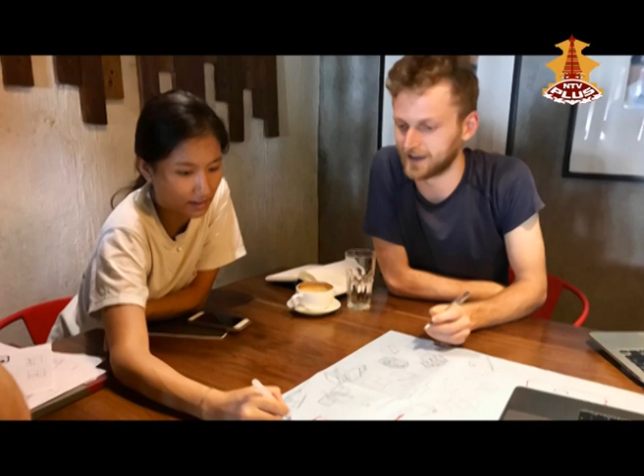We also took a look at the site where the homes would be located in order to let the topography and the views influence our design process. With this information, we've been developing designs for sustainable earthquake-resistant homes in Silung that we're excited to share.

The site visit helped us contextualize where our project would be located and truly understand the needs and values of the people who would be living in the houses we design. Through interviews with locals and tours of their current homes and farmland, we identified 2 main conceptual ideas unique to our design, while still fitting within the limits of earthquake-resistant structure and a vernacular style local to the region.

First, an open common space, and second, a flexible private space.

One of the most memorable moments of this trip was when our entire team sat on the front deck of a house eating freshly boiled potatoes with the family that lived there. We felt very welcomed by this warm gesture, and after hearing other stories of how villagers welcomed their guests, we felt it was incredibly important to recreate this space in our design.

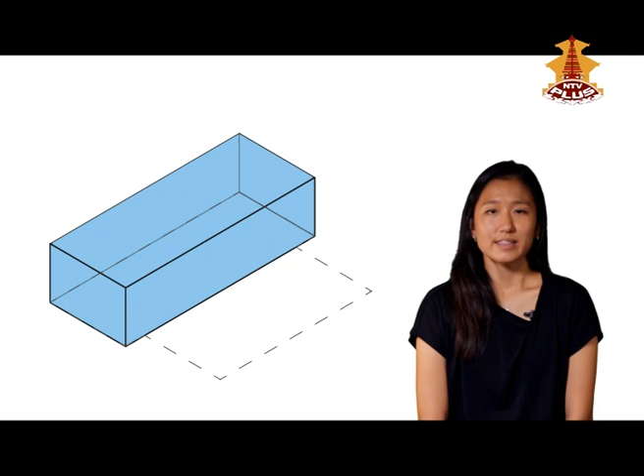In addition to a similar outdoor deck space covered by a roof overhang at the front of the house, we decided to bring this potato space inside the house as well. We did this by incorporating a tall, open kitchen, living, and dining space that would help facilitate these special moments even during the colder winter months.

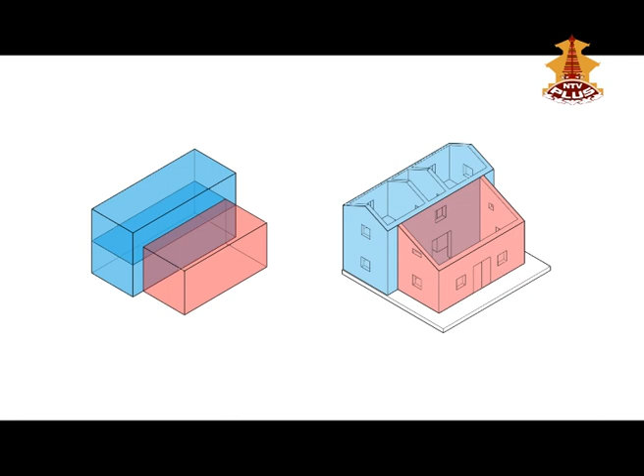We also noticed that each family's physical living conditions were influenced by their specific needs and family sizes. Because we want a design that is easily replicable across all hilly regions of Nepal, we created a plan that could be easily adapted to best fit the lifestyles of those who would live in them, without having to redesign the entire structural system.

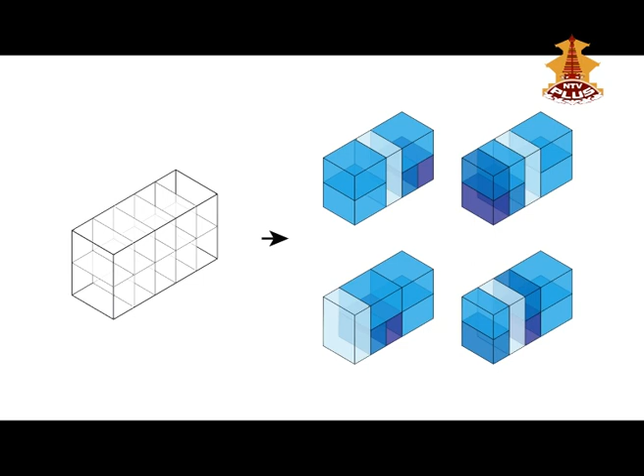Although this image depicts a medium-sized prototype, a house can have as little as 2 twelve-foot by twelve-foot bedrooms, or as many as 5. All houses would include a bathroom and storage space inside. Finally, our prototype for the medium-sized house includes a small window from the second-floor private area looking into the tall common space below, providing a visual connection between the public and private areas of the house.

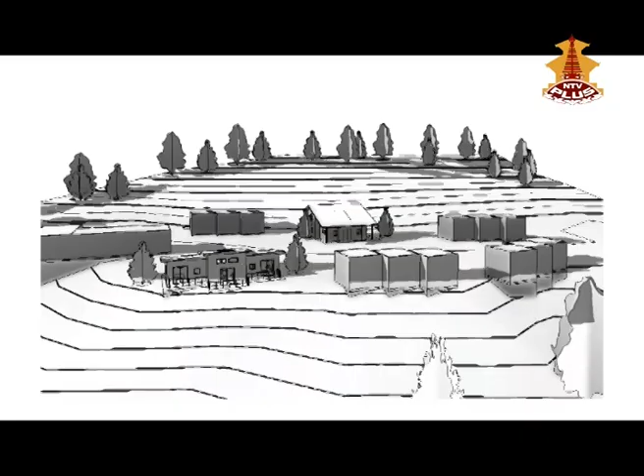After coming up with our design strategy for both the site and the house, we used some digital tools to help evaluate our designs. These tools help us integrate architecture, structural design, energy efficiency, and thermal comfort into one complete concept.

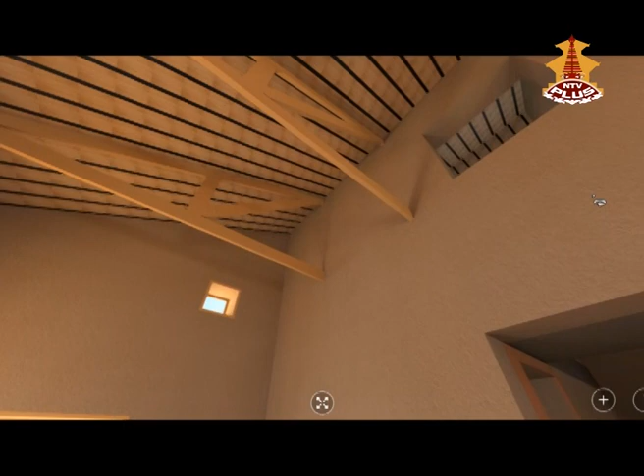By creating a 3D model of the house, we can digitally experience what it's like to actually be inside the rooms. Here, we're looking around the kitchen and dining space to see how the windows and openings, structural design, and furniture layouts look from the inside.

We can also experience what the design looks like from the outside, standing on the site. This can help us understand if the design fits in with the area around it.

When designing a house in a climate that gets both cold and hot, it's important to regulate the interior temperature of the house as much as possible. In the northern hemisphere, the sun moves across the southern half of the sky, casting its powerful rays on the southern walls of our buildings. This solar energy can help heat the house in the winter if we let it in through the windows.

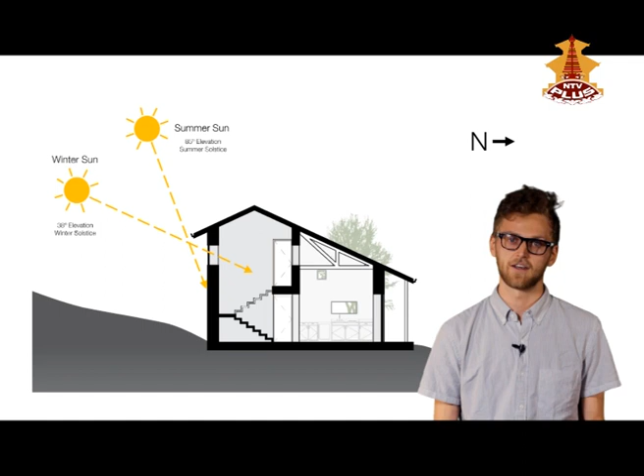We can take our 3D model and digitally place it in the exact region of Nepal where our site is located. Then we can see how the winter sun shines on the house.

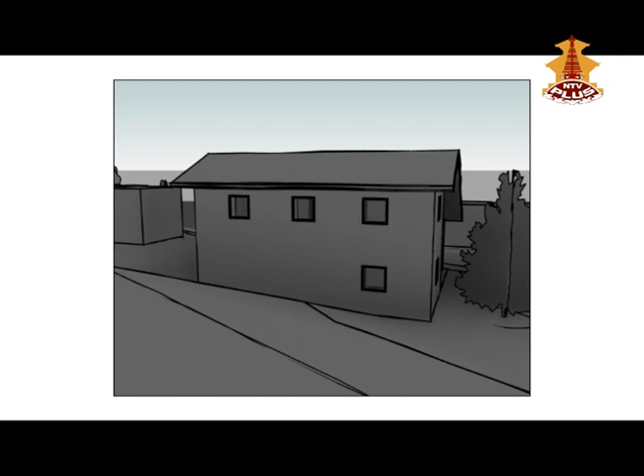Since no shadows are being cast on the windows, our concept of heating the house with the sun is working. In the summer and fall, however, it can get quite hot in the hilly regions of Nepal, so we want to let as little solar energy into our house as possible. The roof overhang in our design does a nice job of keeping the sun's rays off our windows, helping the house stay cool when it's hot outside.

These digital modeling tools can help us quickly evaluate the architectural concepts, structural designs, and aspects of comfort that are critical to building a better house. One of our design goals for this project was to figure out how to design for thermal comfort.

Thermal comfort describes the conditions in which you might feel too hot, too cold, or comfortable within a space. Indoor thermal comfort can be based on a variety of factors, such as the weather, how much insulation or thermal mass you might have in your building, or even what you're doing or wearing indoors. And because we're designing for a climate that's constantly changing, this becomes an especially important challenge. So, to improve thermal comfort, house designers will often look at a variety of design factors, such as heating and cooling devices, building materials, and ventilation.

One strategy we used was thermal mass, the ability for certain materials to resist changes in temperature. Materials that are higher in thermal mass are able to capture heat during the day when the sun is out and warm, and release it during the colder hours of the night in order to keep the house at a constant temperature. For that reason, we chose materials like mud and stone for our walls and floors.

And for days when it's cold outside and you don't want to lose heat from your home, insulation materials like rock wool are a great option for keeping your spaces warm.

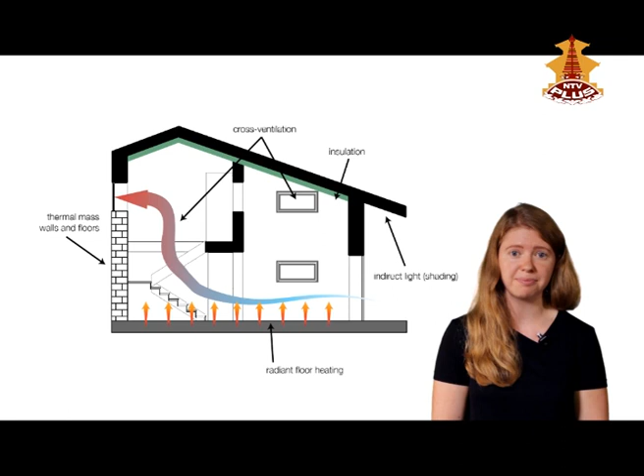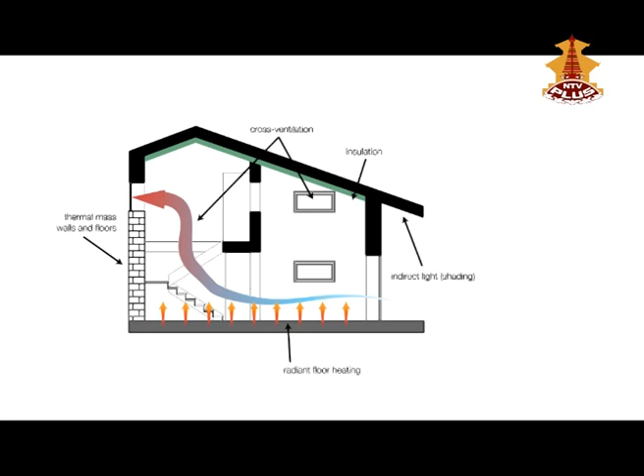We also used cross ventilation, which occurs when you have openings in your doors and windows that are arranged on opposite sides of a building, allowing air to enter and exit. We placed our windows and doors strategically in this manner in order to keep our house cooler. This design is effective because it allows for more frequent changes of air in and out of the house, naturally keeping the indoor temperature cooler when it's hot outside.

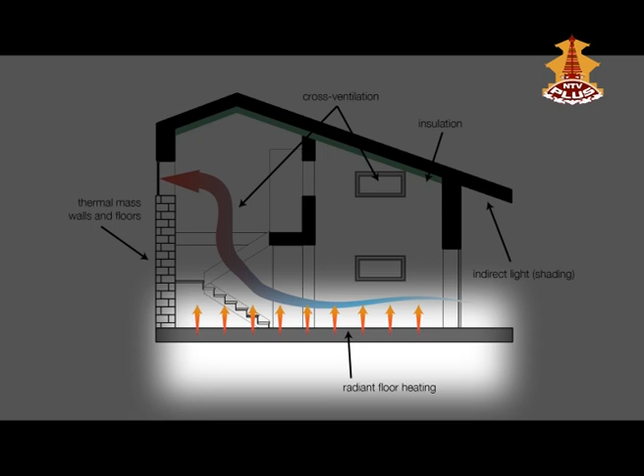Finally, to heat our homes, we wanted to look at an option that was more efficient than popular space heaters, which can often create cold spots. Because traditional heaters warm the air and not the objects or people inside, there could be areas of the room that are extremely hot or cold based on where they are relative to the heater.

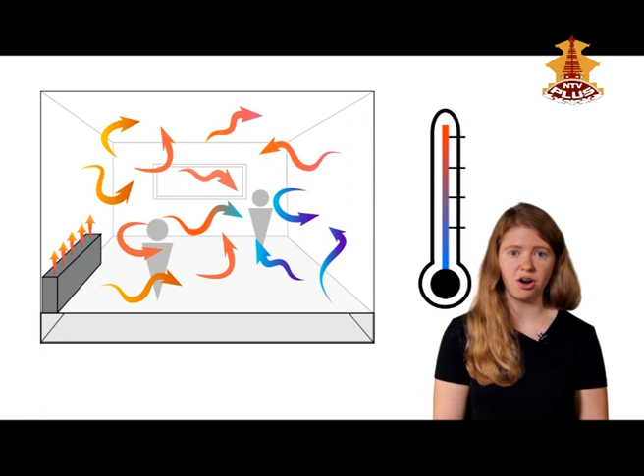We decided to explore a technology called radiant heating. Radiant heating supplies warmth through the floors directly to the people and objects in the room. And because the system does not use fans to spread heat, it will quietly heat your room while avoiding the spread of dust or other allergens all over your space.

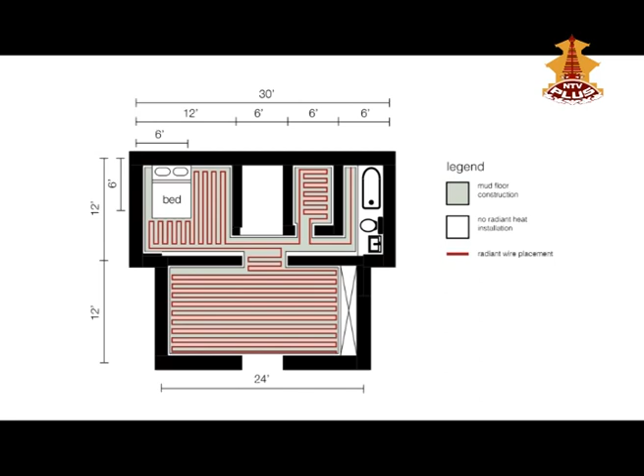For our design, we've chosen an electric-based radiant flooring system to be installed on the first floor of the home. Here, the wires are laid out in an organized diagram under the floors of the home, and they're controlled by a thermostat located at the entrance of the house.

With information on these features and technologies becoming more readily available on the internet and in professional practice, we hope these ideas become more readily available technologies in the newly built houses in the hill regions of Nepal.

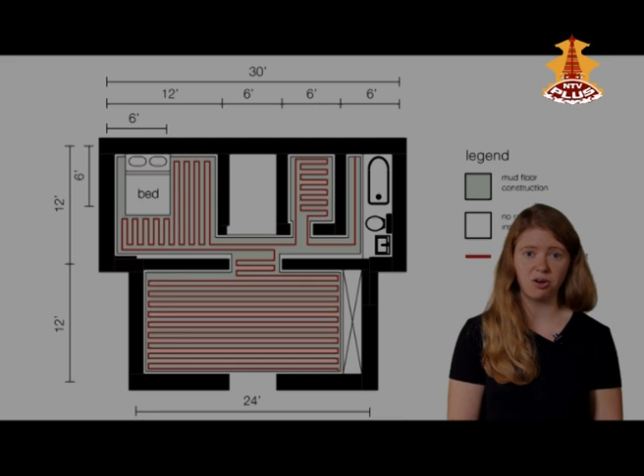Perhaps the most important thing about a house in Nepal, or any structure, is that it is earthquake resistant. Keep in mind that it is not possible to make any building 100% earthquake proof, but there are some strategies we can follow when designing a house to help it perform better should an earthquake occur, and ultimately limit the damage as much as possible.

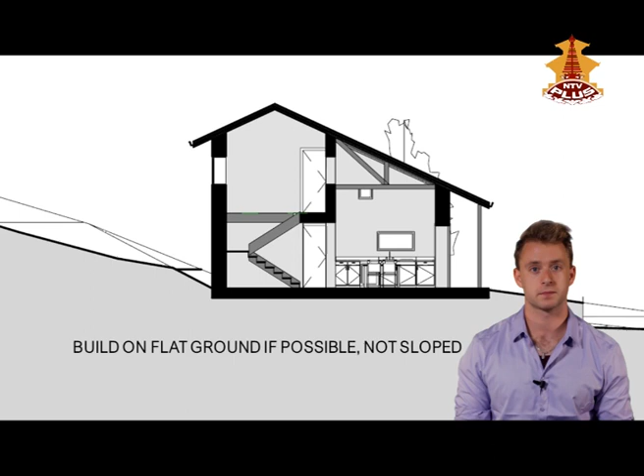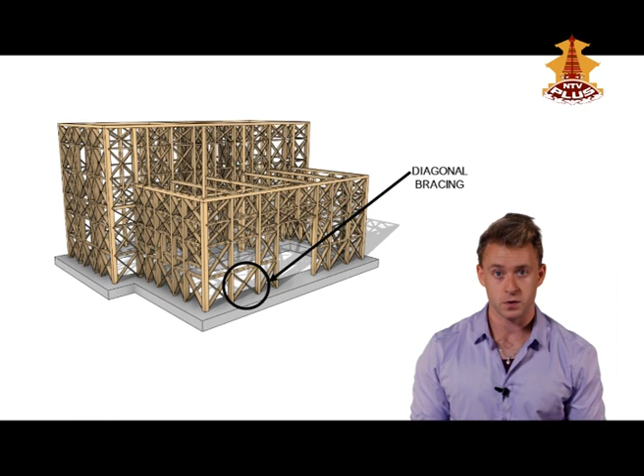Here are a few rules of thumb we followed that will help improve the earthquake resistance of our village home design. First, we decided to place our house on flat ground because flat ground is much more stable than sloped ground. Second, we used symmetric geometry and avoided any irregular shapes or rooms that are too long or thin. We also used diagonal timber members so that earthquake forces can be resisted, designed a proper connection for our house to its foundation, and used a lightweight roof.

We wanted to design the house using as many local materials as possible. Using local materials helps keep the house consistent with the vernacular architecture of Silung and helps keep the cost of the house as low as possible.

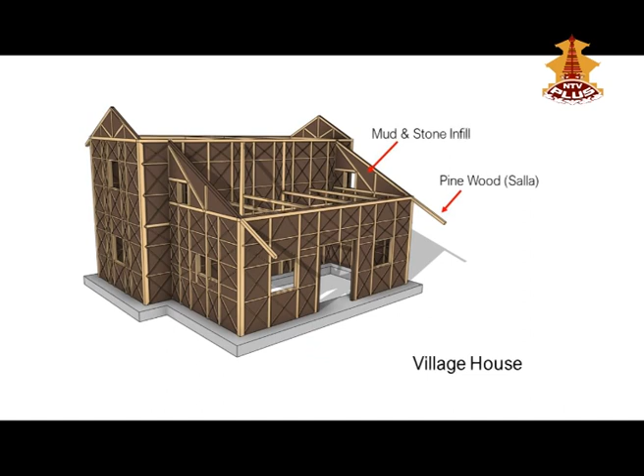We also wanted to demonstrate that it's possible to build an earthquake-resistant home out of local materials like mud, stone, and wood, not reinforced concrete. Reinforced concrete is expensive and generally incompatible with the vernacular architectural style of Nepal, so building an earthquake-resistant home out of local materials is much better.

Materials like mud and stone are better suited to the climate of the Nepali hillside. Houses made of mud and stone generally provide better thermal comfort than houses made of concrete.

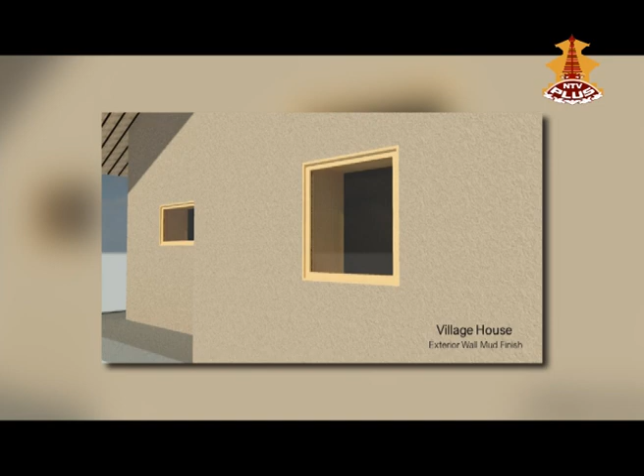Mud and stone houses are cooler in the summer and warmer in the winter than concrete ones. We decided to make the structural system out of pine wood, which is strong, durable, locally available, and provides good thermal insulation. To make the walls of the house, we filled in the gaps between the timber frame with mud and stone and covered both the interior and exterior with a layer of mud finish.

These walls were designed to feel very similar to the walls in a traditional Nepali hill house so that villagers would feel comfortable in the house that we've designed. We decided to make the roof out of corrugated steel because steel is light compared to stone, and this low weight of the roof makes the house much safer in earthquakes.

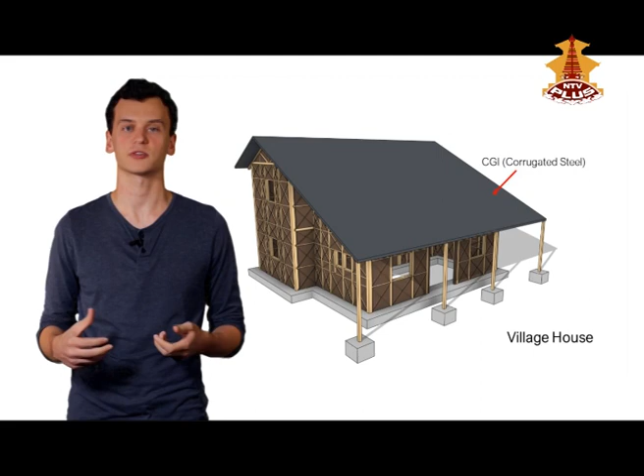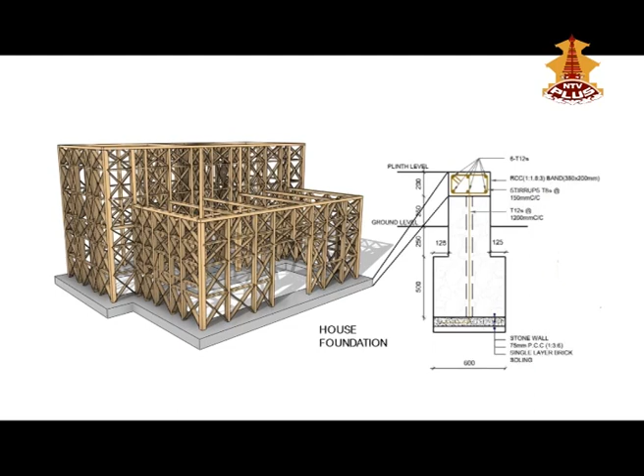The materials and structural system we used were partly inspired by research, but also largely guided by some of the designs created by Nepal's National Reconstruction Authority, which are available to anyone on the internet. For example, our house design uses very similar foundations to the timber design from the catalog, and our design also has the commonly used wooden truss and corrugated steel sheet for the roof structure.

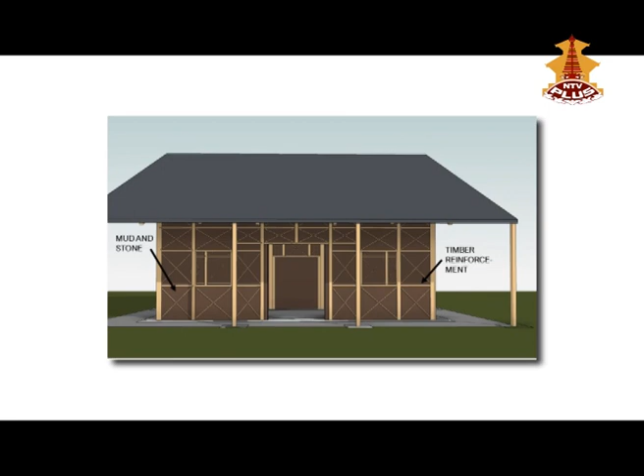Another key point is that if mud and stone are properly reinforced, then they are perfectly safe materials to use in walls for an earthquake-resistant house. Where the NRA has used bamboo or steel to reinforce the mud and stone, we have chosen to use timber.

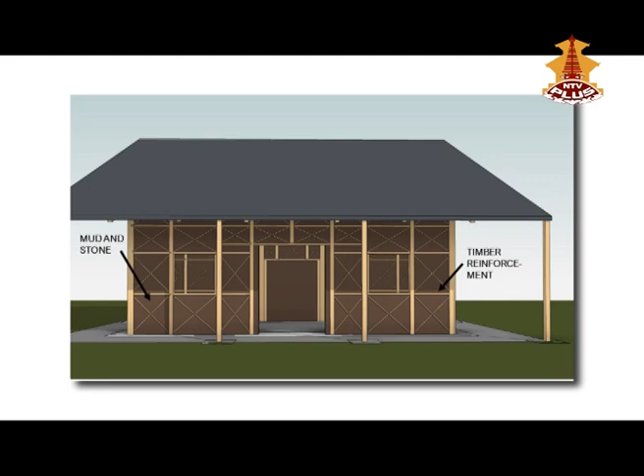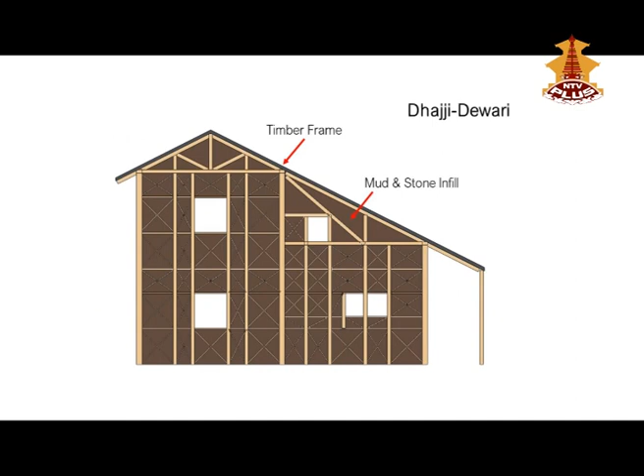The structural system we decided to use is called Dhajji-Dewari. It consists of a timber frame with mud and stone filling the gaps between the timber. The system is commonly used in other earthquake-prone regions of the world like Pakistan, India, and Haiti, but is not yet common in Nepal. We chose to use this system because it's proven to be earthquake resistant, it's compatible with the vernacular architectural style of Nepal, and we think that the system could be replicated throughout the country.

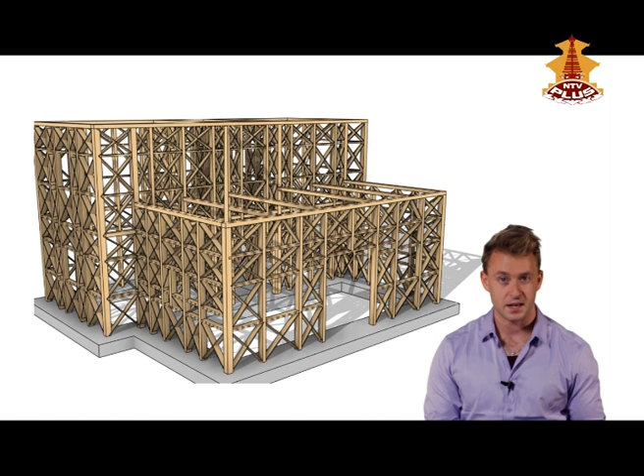The idea behind the Dhajji-Dewari system is that there is a wooden frame for supporting the weight of the building itself, as well as everything else inside it. The closely spaced frame allows for there to be a lot of diagonal timber members between the gaps. These diagonals are the primary way for resisting earthquake forces.

Then, the triangular spaces between the diagonals can be filled with mud and stone. The mud and stone infill helps to absorb energy from the earthquake and helps to protect the diagonals and timber frame from damage. The timber frame is designed to act as one continuous unit by using special interlocking wood connections held together by nails. The roof is also a timber frame, but instead of using mud or stone, it uses corrugated steel as a cover.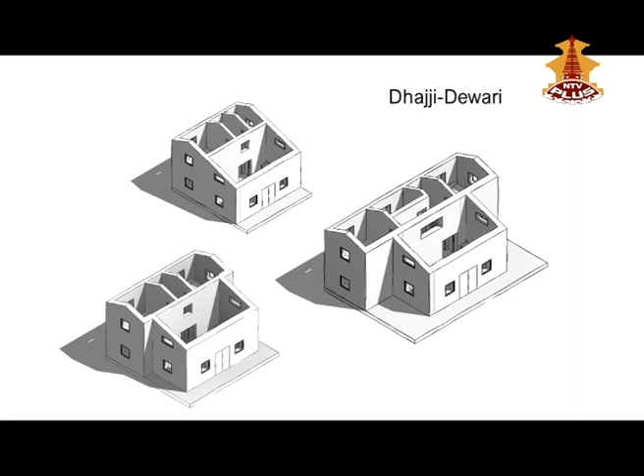It was important to us to choose a structural system that could be used in houses of several different sizes. If villagers want to build a small house, a medium-sized house, or a large house, all of these houses could be supported by the same Dhajji-Dewari structural system.

One main concern our design hopes to eliminate is fuel dependence. In urban Nepal, LPG is by far the most common form of fuel for cooking, heating, lighting, or otherwise. This fuel is of course primarily imported from India and is therefore susceptible to price fluctuation. In rural Nepal, especially in the high mountain region of Sailung Dolakha, fuel imports and transportation costs become exponentially more expensive. It is for this reason our design will incorporate localized fuel generation by way of anaerobic digesters.

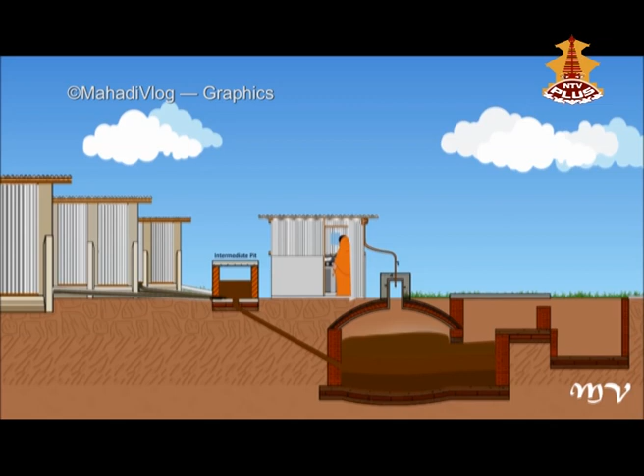Biogas is a sustainable, reliable, if properly maintained, clean fuel option with a multitude of useful applications. The inputs are waste from livestock, food, agriculture, and in many cases humans. When these elements are combined and mixed in a dome at proper temperatures and pressures, the output is raw biogas.

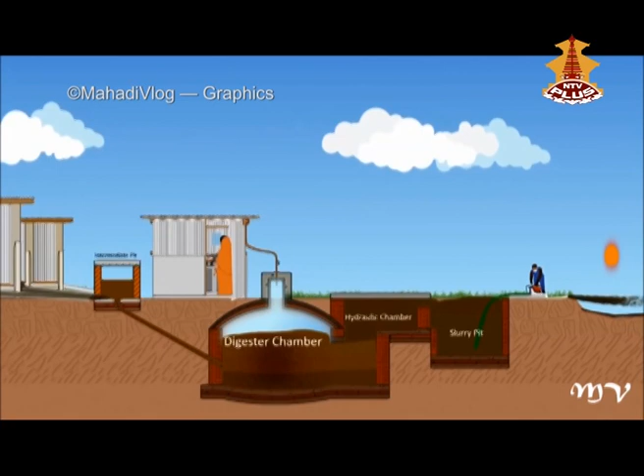Which, when filtered, can be directly piped to a stovetop burner. The leftover slurry in the digester can then be used as active fertilizer. This process is an efficient, environmentally friendly option to fuel sourcing.

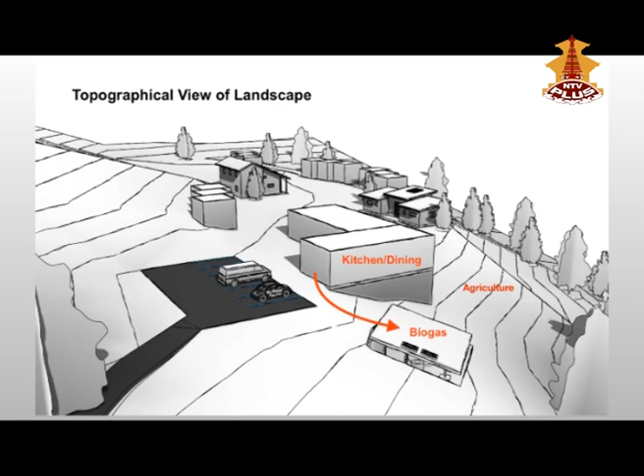The initial design will include 2 digesters located slightly downhill from the flatland, but still near the larger kitchen dining area. This simplifies the piping infrastructure, hides the smell of the digester, and locates the post-fermentation fertilizer near the agriculture.

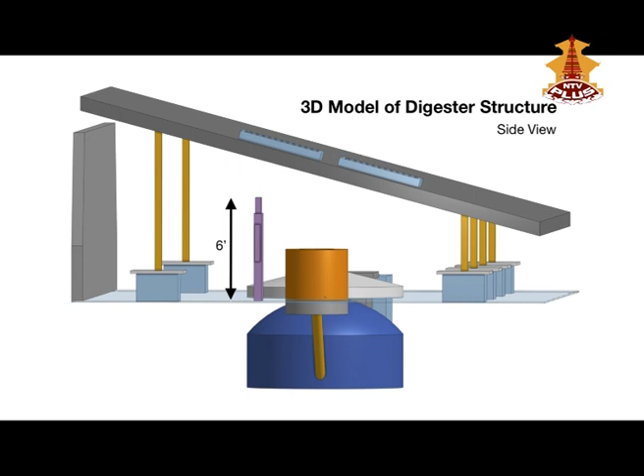Part of the difficulty of anaerobic digester operation in high-altitude regions is maintaining optimum slurry temperatures during the winter months. This concern will be mitigated by thermal insulation of the dome, as well as a protective structure to shield the digester from weather variances. Beyond external protection, future plans will hopefully incorporate active solar heating for potential below freezing temperatures in the winter.

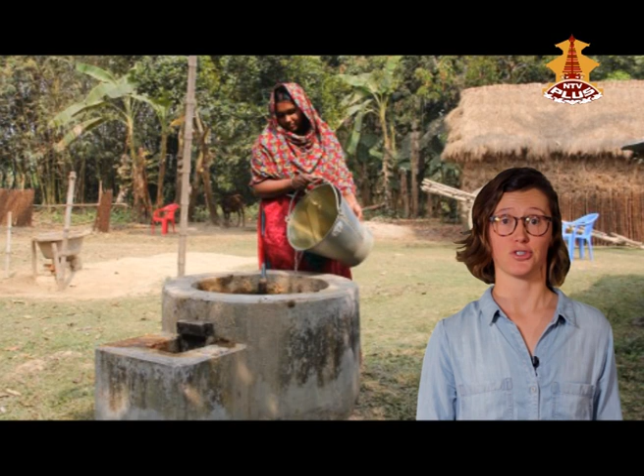In addition to energy, social and health motivations have greatly influenced the design of the digester operation. Three key points summarize these influences: improved air quality, gender inequality, and employment. As it stands, the majority of rural villages use firewood, dung, and other solid forms of biomass as fuel for cooking. Stoves are typically primitive and highly inefficient. Suboptimal burning conditions generate extremely harmful, poisonous pollutants that directly affect those who are repeatedly exposed.

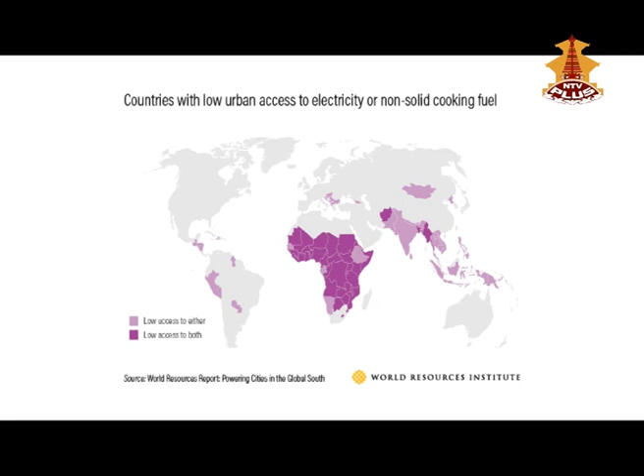Poor air quality in the kitchen is a leading cause of death as well as severe illness in Nepal and other communities in Asia and sub-Saharan Africa with insufficient energy access. When you cook inside, with minimal cross-ventilation, multiple hours a day, the kitchen very quickly becomes the most dangerous room in the house. Women, often the designated cooks for the family, bear the brunt of these consequences.

Which brings us to gender inequality. Women are not only disproportionately exposed to high concentrations of harmful pollutants, they also spend much of their time searching and looking for fuel. These are hours that could be spent learning to read or write, as literacy rates for females in rural villages are troublingly lower than their male counterparts, nurturing or teaching children, or assisting in agricultural work and contributing to the primary source of family income. To be seen as producers, not strictly reproducers.

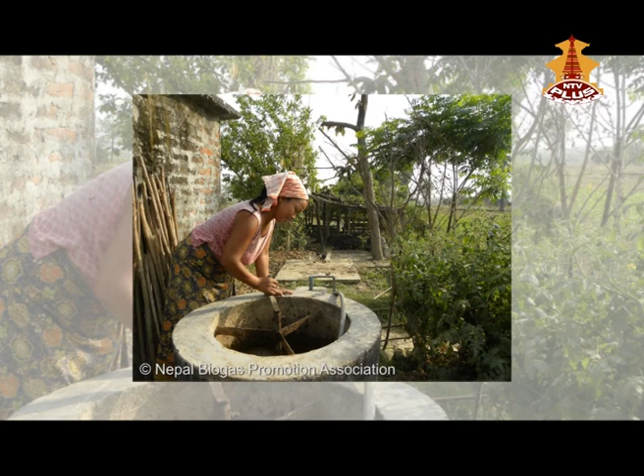Finally, proper maintenance and management of the anaerobic digester operation can and should be treated as a full-time job. In many cases of communal biogas operation, responsibility falls to no particular individual. There's no sense of personal accountability. As a result, the daily input requirement for the digesters is not always met, and biogas production plummets or stops altogether. By permanently employing workers to tend to the digesters, manage the daily inputs, and be responsible for the production of biogas, the likelihood of success is much higher.

Employment not only provides a reliable source of income to promote higher standards of living, it legitimizes the biogas waste operations system as a model for local communities as well as neighboring villages to invest in similar protocols.

Two central themes that we considered in our design process were waste and water. The first, waste management, is something that is definitely lacking in rural Nepal, as we got to witness firsthand on our trip to Sailung. Trash seems to be everywhere these days, and this is a large problem and one that will not be solved overnight. The first thing that we wanted to do was create a central, localized place for trash to be both collected and sorted. Designating a specific location for waste collection is very important for sustainability, as well as properly managing that waste. Overall, this is a very simple concept.

All you need are 3 large containers, one for compost, one for recycling, and one for trash. What goes into the compost? This can be any types of food waste, from leftover rice to corn husks that you never used. What goes into recycling? This could be papers, plastics, glass, metals, things like that. And finally, what goes into trash? These are things that can't be recycled or composted, like chip bags or used toilet paper. We believe that creating a central location for trash allows people to learn how to sort their trash as well as keep litter off the streets.

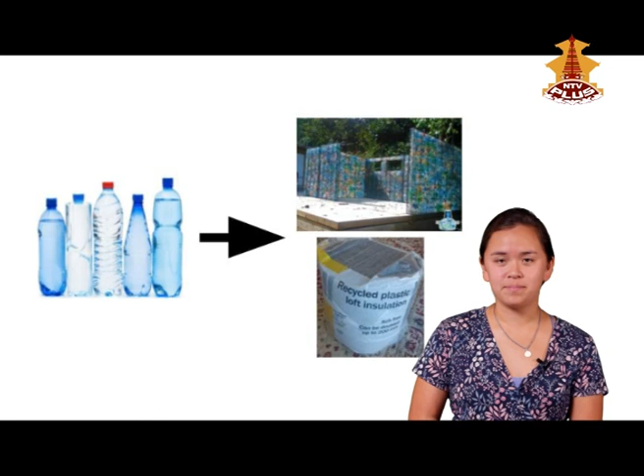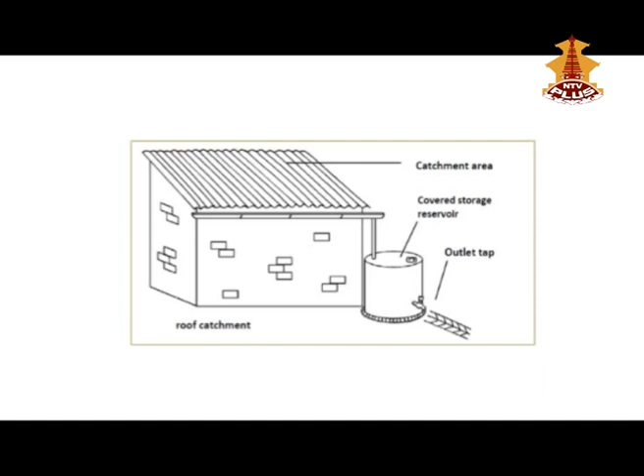The second theme we considered was water collection. When we spoke with many of the villagers on our site visit, they mentioned that water could be very hard to find in the winter months. One solution that we've incorporated into our design is a rainwater collection system. We saw the system in many of the houses that Habitat for Humanity has been rebuilding, and it's a really great and easy way to store and collect rainwater.

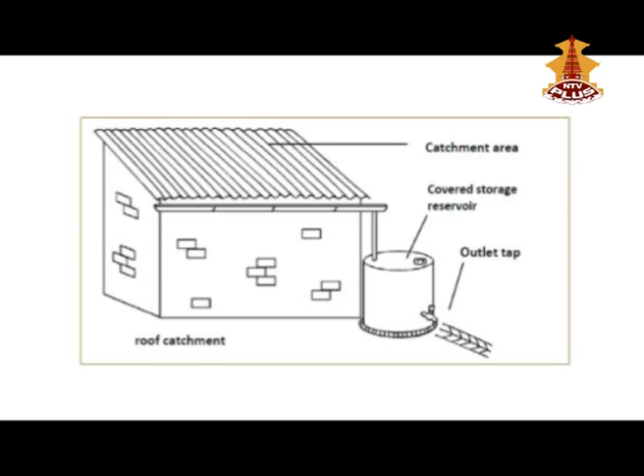The system consists of PVC pipes that line the gutter, and they act as a funnel for any rainwater that comes off of the roof. They then funnel this rainwater into a large collection tank. This rainwater can be used for many things, like cooking, agriculture, showering, and cleaning. With some basic filtration systems, it can also be used as safe drinking water.

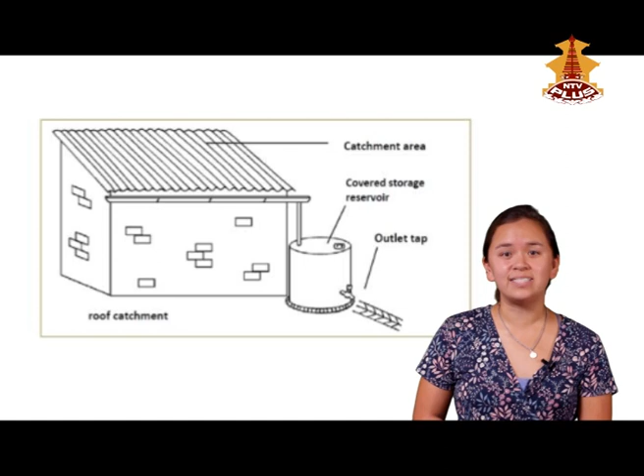Ultimately, we hope our design will serve as a model for this community and other local neighboring villages. We hope that they will invest in proper waste management, commit to clean fuel sources, and hold themselves to a higher standard of cleanliness. We hope the manuals provide innovative concepts to aspiring young engineers on sustainable designs.